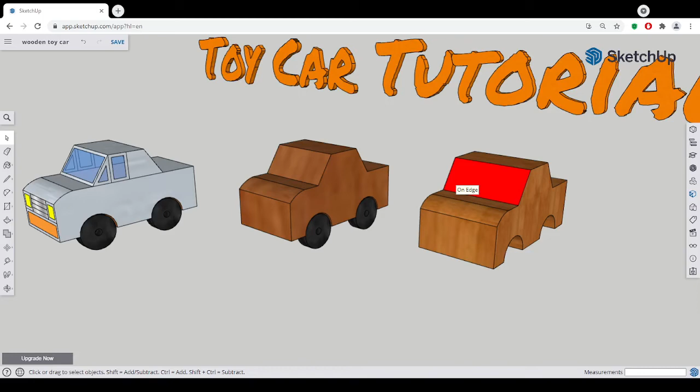Okay, welcome back. This is the third and last tutorial on the toy car. I'm going to first of all show you how to do some wheels.

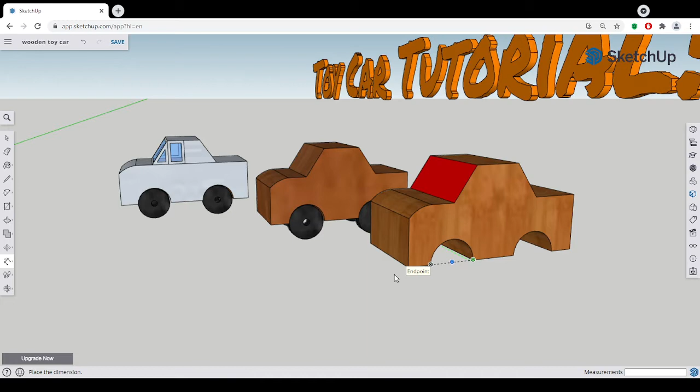The first thing I'm going to do is measure using the dimensions tool over here. You should see this on your menu already, since it's on the 2016 menu. I've got a measurement here of 63 millimeters, that's my diameter, the maximum diameter of a wheel. So what I'm going to do is not use that directly, I'll just use it as a handy little tape measure.

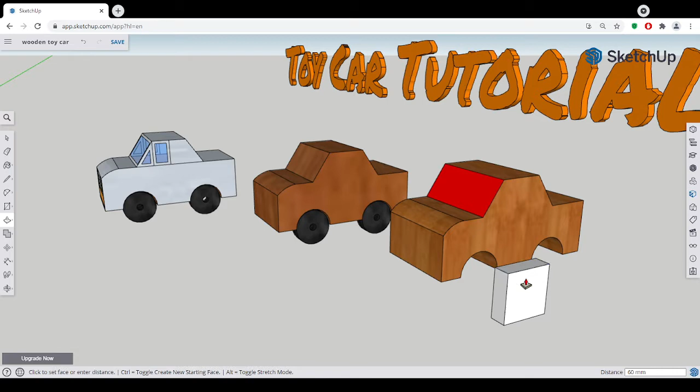What I'm going to do is draw a rectangle on the floor. I'm going to make it 60 by 20, and then I'm going to pull this up 60. And there we have, once again, another shortened rectangular prism.

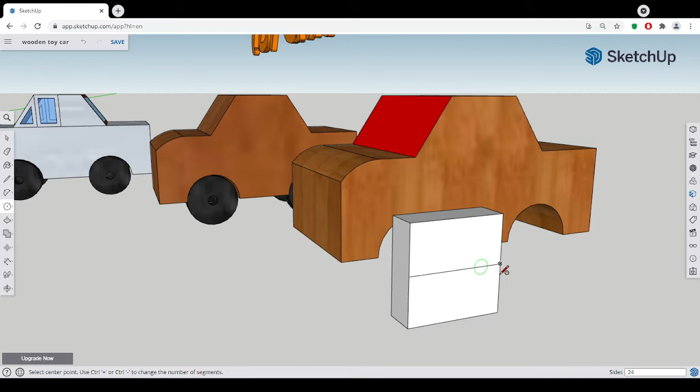What I'm going to do here is first find my midpoint and draw across the block, that's all I have to do. Then I'm going to draw a circle on the block, and it will find it straight away. Once I've done that, I'm going to rub away that middle line because I don't want that anymore, and I'm actually going to pull these bits away.

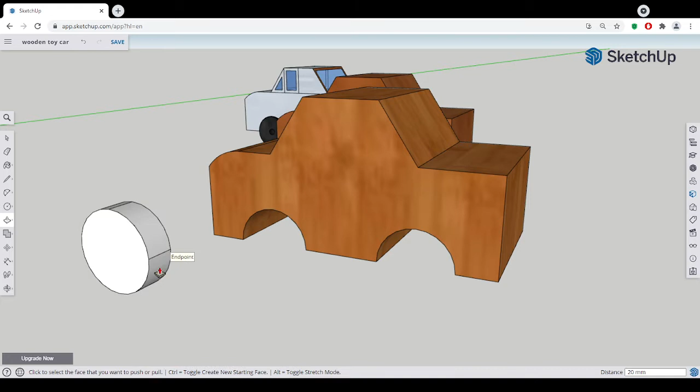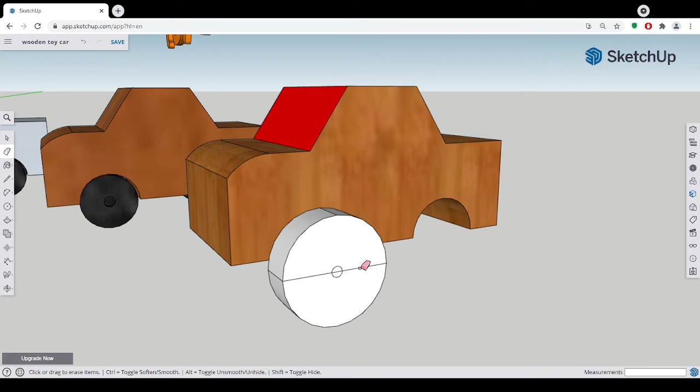Now you might notice on the example I have over here, I've actually got a circle in the middle. You can have a circle in the middle for an axle. I'll put that in again, I think I made it something like 6 millimeters, no, I think I made it 3 actually, so I'll just make it 3 again. And I'll rub away those lines. If you have a line on something and you try and pull it, it's not going to work.

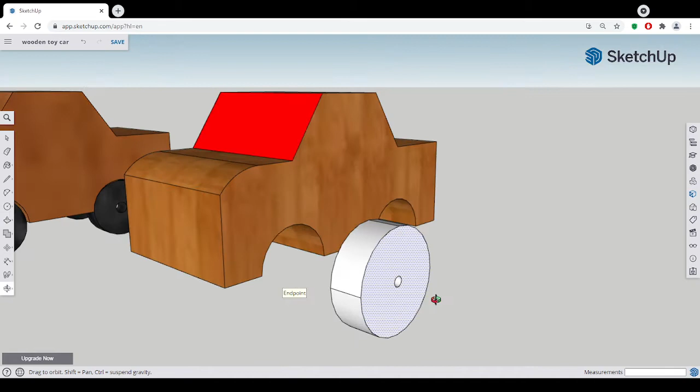I'm going to pull that so that there's a hole. Once again, this is what can happen, it can kind of go out like that too much. So you're going to use the end point, and there you've got a nice clean hole through. You can see the other things.

Now I've got one wheel and I want to make four. How can I do this? I'm going to use the select tool, select the whole thing, and right click on my mouse.

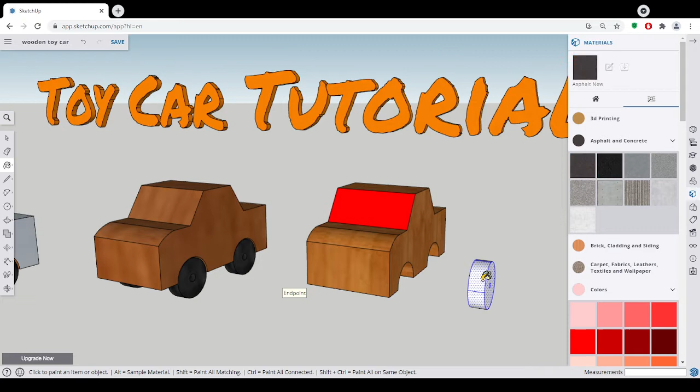Oh, before that I think I'll add a texture to it. Let's just use the paintbrush, the paint. I'm going to use asphalt because that kind of looks a bit like tire material. Yeah, that's fine, maybe if we're talking Minecraft here, I don't know.

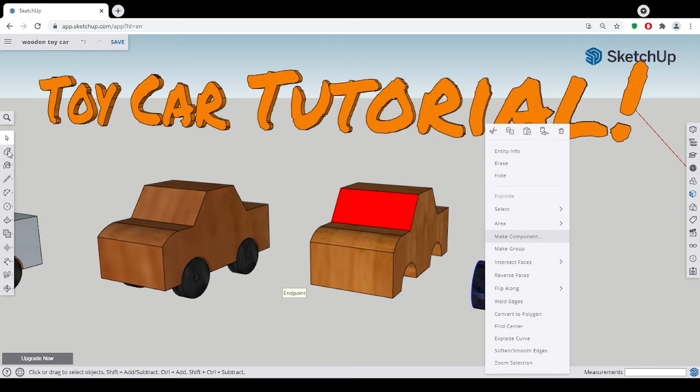And I'm going to select the whole thing, right click on my mouse, and make it a component. Making it a component will just make it an object which is a lot easier to move. It's just taking a moment. Here we go, I'm not even going to name it, I'm just going to say OK. Great, okay, so that's now a component.

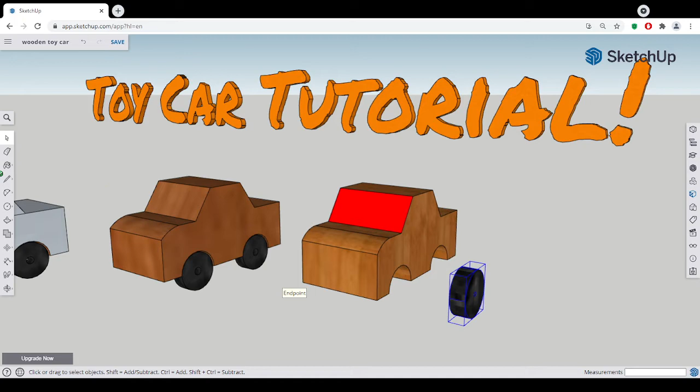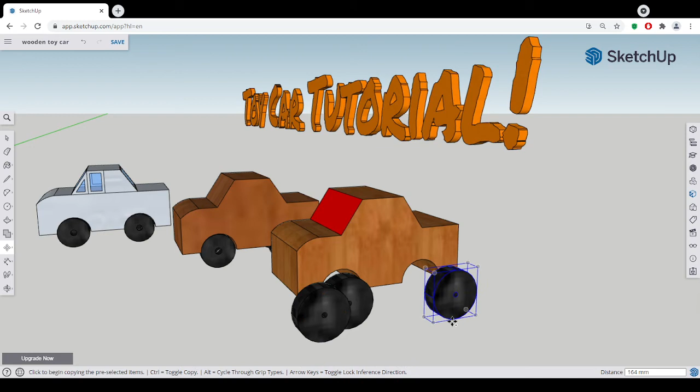Now what I'm going to do is take that component and duplicate it by using the move tool. I'm going to select the move tool and press Control, and what happens is, it might be Control or Alt on your computer, I can duplicate this as many times as I want. I'm going to press Control again to switch off the duplication. Now the last thing I want to do is place this, so I'm going to grab the end point.

Where do we have you? I'm going to just slot that in. This is where it gets a little tricky, so you're still moving things around. Now I've selected this component.

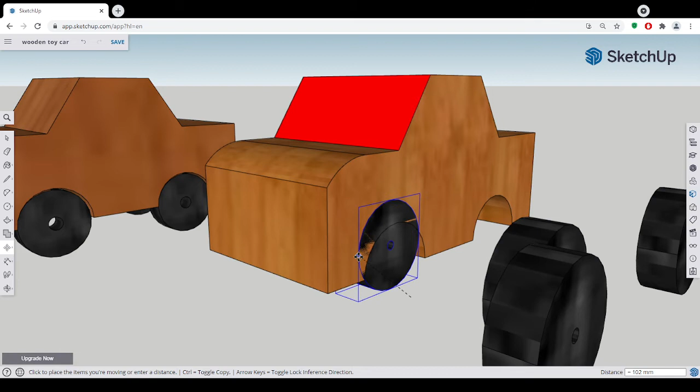I want to just snap it to there. There's a little bit of a gap there, that's fine. Okay, so I need to now deselect and reselect the other component and move that. Let's move that into it first and then down. There we go, that's fine.

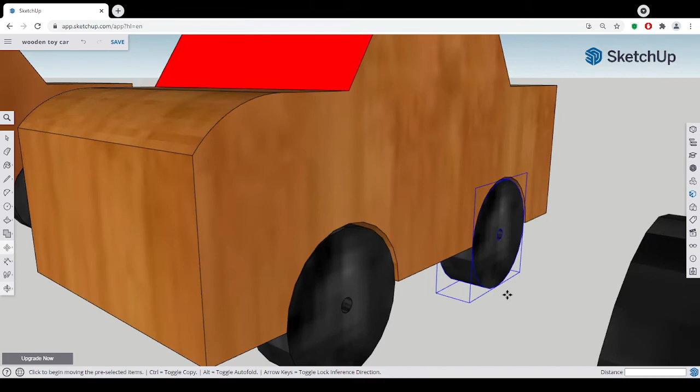I'm going to do the same on the other side, so I'm going to grab them from this side. Oh, hang on, didn't want to do that, just undo. That's back in place, good. Yeah, I forgot to deselect the other one. You have to select the one you want to move, otherwise it still thinks that you want to move the other one.

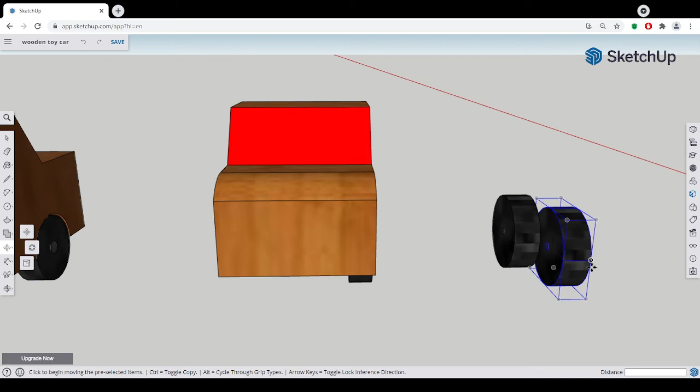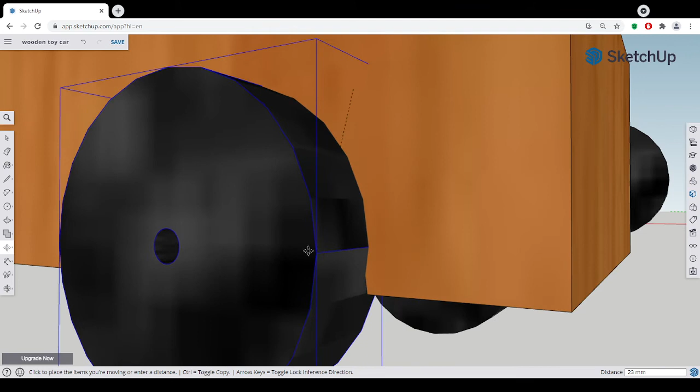So that's a good tip, always select the correct wheel. Obviously you want to just get this point here. Now what you might notice what I'm doing, and it's tricky, you have to have everything in the right position, is I'm using a very kind of corner on a circumference, an end point as it's called. Hang on, if this happens to you, just use this zoom extents and it'll bring you all the way out, and then you can zoom back in. Sometimes you kind of get stuck in between a piece of, when you're up close to something.

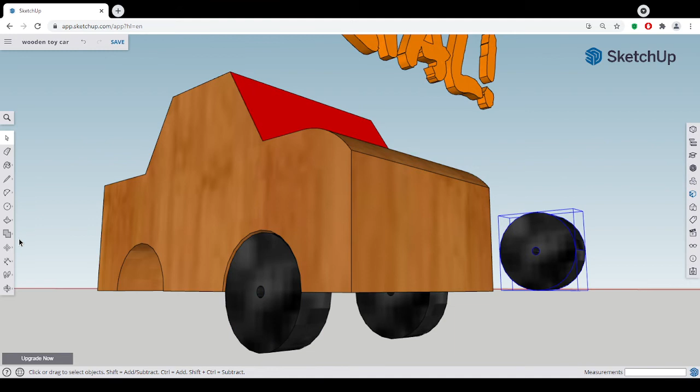So let's choose the move tool. I'm using that, I'm just snapping it to the very end. I need to select this last one and move it into place. Okay, hopefully, yeah, great, it's done.

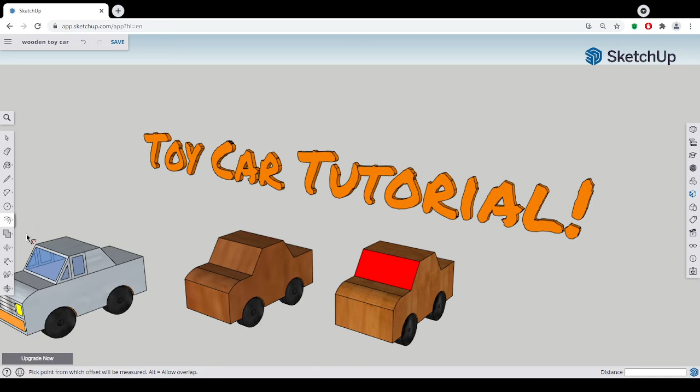Right, super quick, I'm going to just show you how to use one of the last tools, which is really interesting, it's called the offset tool. And that's how I got these windows here. So what I'm going to do is just very quickly show you what it does. It draws parallel lines from all four sides of the outer sort of boundaries of my box, and I can also put a value on that, which I'll make 5.

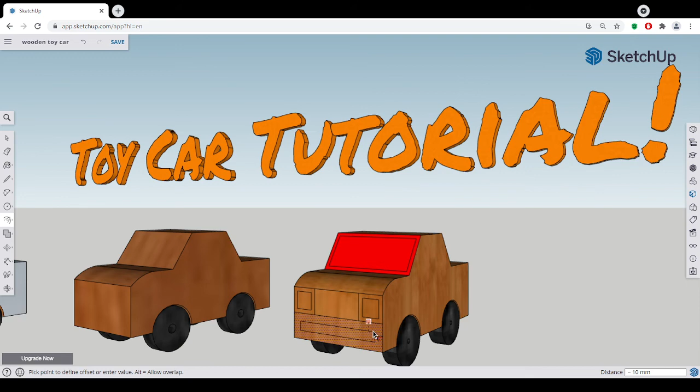Now you can see there I've gone into a lot more detail on the third car. I'm just going to show you, well, I'm just going to go to the midpoint here again. I'm going to make a midpoint here, and another midpoint here, and you can see what I'm doing here. I'm just dividing up, like halving and quartering up the shapes, and then I can use my offset again, so I can do 5, do 5, do 5, and I can kind of draw a line along here and divide it up as well.

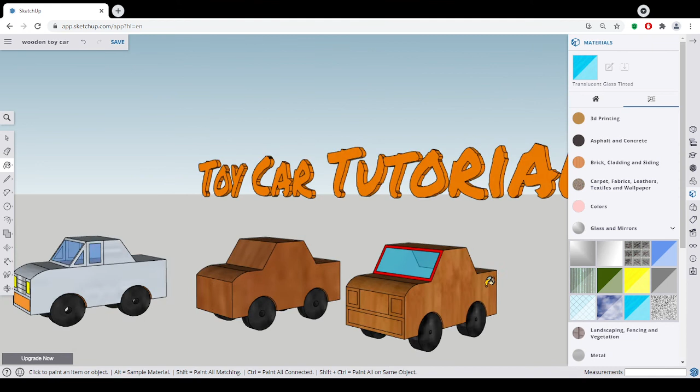And what I've done there lastly is I've just added a glass and mirrors texture when I've rendered this, and I've just added glass, for example, and then you can see through. The other one, I think I just used some colors like yellow for the lights, because that's usually what they are, and I've used a different color for the grille of the car as well. There I've used metal, and this for the number plate, obviously.

So just have a bit of fun with that once you're done. Obviously this is the more sort of advanced end where you've learned a bit about offset and also about component making. Alright, hope you found that fun.